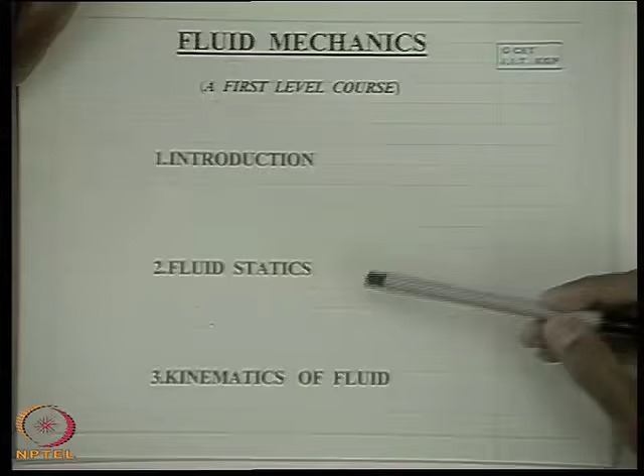Then we will come to fluid statics, which will cover all aspects of fluid statics, followed by kinematics of fluid. So the lecture schedule will go like that: fluid statics part 1, part 2, part 3, and then kinematics of fluid as number 3.

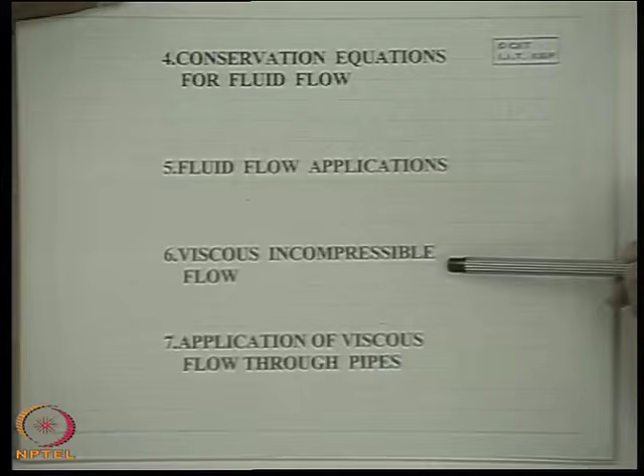Then we come to the next topic, for your exposure: conservation equations for fluid flow, the equations that govern the flow of fluid. Then fluid flow applications - details of these will be available in your leaflet or course curriculum given to you. Number 6 will be viscous incompressible flow, and number 7 will be application of viscous flow through pipes.

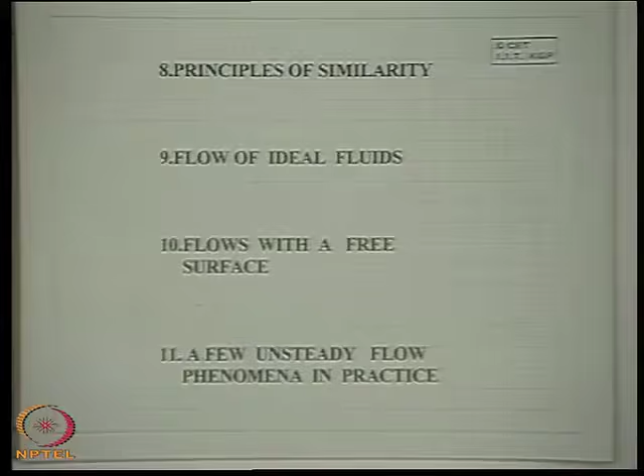Number 8 will be principles of similarity, which is very important in the field of experiments. One cannot do anything without the principle of similarity. If you want to predict the performance of any system in practice, in field, you will have to do model experiments in laboratory. But the question is, under what condition should model experiments be done? What should be the altered scale factors in terms of all variables, not only the geometrical shape of the model, that will allow you to predict results from your laboratory test for the actual system in practice. This is a very important subject at this level.

So, principles of similarity, then flow of ideal fluids, then number 10 flows with a free surface, number 11 is a few unsteady flow phenomena in practice, number 12 and 13, the last two lectures, introduction to laminar boundary layers - this will go to a little advanced stage - and then introduction to turbulent flow.

After that I will tell you about the books. As you know, the subject is classical, so there are a number of books. As a teacher, I do not feel you should always follow just one or two books. You can follow any book that covers the syllabus or course curriculum well. Book reading is a must for your concept - only the teacher's lecture will not do, because you will have to read books and solve problems from books. There are plenty of books, any will do, but let me mention a few good textbooks.

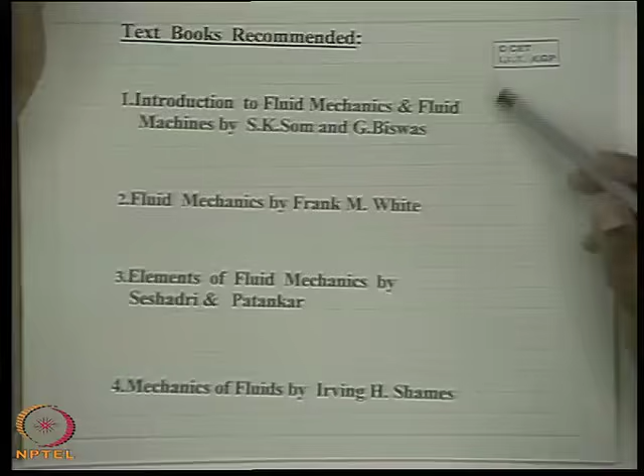The first book is by me, Som, and G. Biswas. I have already told you Professor Biswas is from IIT Kanpur. This book was written based on our teaching experience at IIT Kharagpur and IIT Kanpur. You can see this book is in the market, published by Tata McGraw-Hill.

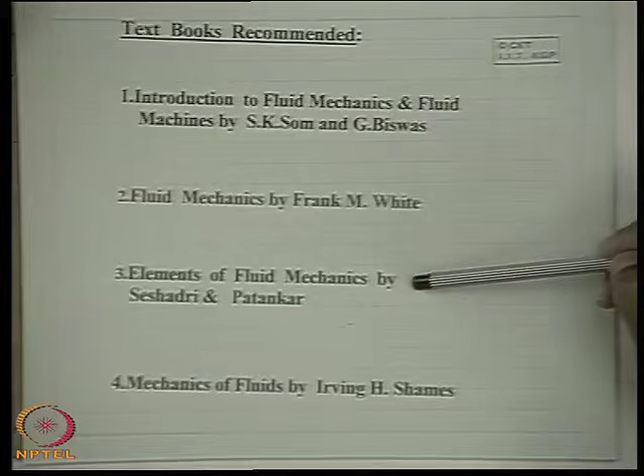Then Fluid Mechanics by Frank M. White, which is again a very good book, published by McGraw-Hill, widely followed in American universities. This book you will get in the library, but you probably cannot purchase it as it is costly. Other books are Elements of Fluid Mechanics by Seshadri and Patankar. Another very well-known classical book in the field, also by McGraw-Hill, is Mechanics of Fluids by Irving H. Shames. These are the textbooks recommended for this subject.

Now, after this, let us try to concentrate on the subject from the beginning. What is fluid, what is meant by fluid from the viewpoint of mechanics? How do you define fluid from the viewpoint of mechanics? The very first definition of fluid from the viewpoint of mechanics comes with its distinction in behavior from that of a solid.

If we apply a tangential force or shear stress to a solid, our common experience, or what we have already read, shows that the solid undergoes a definite deformation. Even if the shear stress exists, the solid may be under equilibrium with a particular shear deformation. And if we lift up the load, then what happens? The solid may or may not regain its shape - it may completely regain its shape or may not completely regain its shape.

Within certain limits, if the stress is relieved, the solid regains its shape, or beyond certain limits, the solid may not regain its original shape, or only partly. But fluid behaves differently: if a tangential force is applied to a fluid body, it goes on continuously deforming. You cannot make fluid at rest; it goes on deforming continuously.

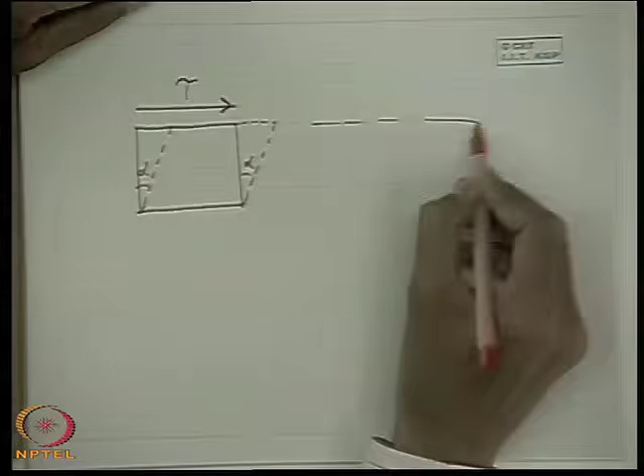Whereas if we have a fluid flowing, consider a fluid element in this flowing stream. If a shear stress is applied on the fluid element, a linear element in the body goes on continuously deforming. If you see a linear element 0,1, it goes to 0,2, 0,3, 0,4, like that. That means a continuous deformation takes place, and this continuous deformation constitutes the flow.

So we come to two very important conclusions from the mechanics point of view which differ fluid from solid: solid can resist shear stress under static equilibrium with a finite deformation, and it can regain its original or partly original shape when the load is relieved. Whereas fluid goes on continuously deforming, meaning fluid resists tangential force only under dynamic condition. It cannot resist tangential stress under static condition. It does resist the tangential stress, definitely, but while resisting, it goes on moving continuously, meaning a continuous deformation takes place.

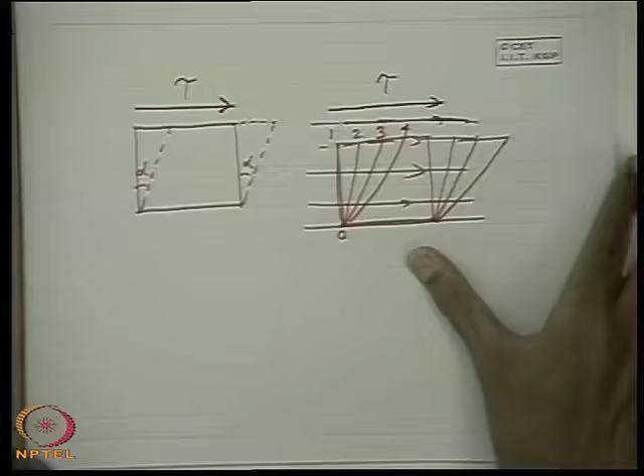Now, after this, I will tell you another very important concept before proceeding further: the concept of continuum. Write: concept of continuum. What is meant by the concept of continuum, or continuous medium?

The two terminologies are continuum or continuous medium. What is meant by this? Very simple. In the description of matter, when we define a property or parameter, for example pressure, velocity, or temperature, we define it as a continuous function of space within the matter at any time, or as a function of space and time.

So what does this assume basically? It assumes that at each and every point in the matter there is a molecule, because all matter is composed of molecules. Only then can the property be defined as a continuous function of space in the matter, with no discontinuity. Though matter is composed of molecules with gaps between them, we always assume while defining properties this way that there is a molecule at any time, at any point in the matter, meaning the gap between molecules is almost zero.

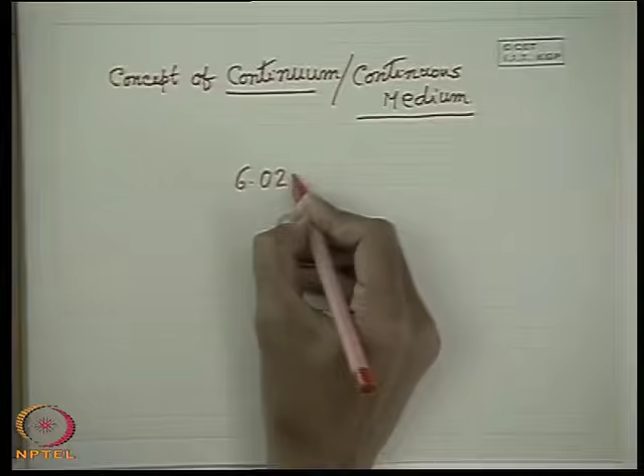The number of molecules within a certain volume of gas is given by Avogadro's hypothesis. If I recollect, Avogadro's number gives approximately 6.023 into 10 to the power 23 molecules, at standard temperature and pressure, per 22.4 liters of gas. So at that standard condition, you can find a molecular density of approximately 2.7 into 10 to the power 25 molecules.

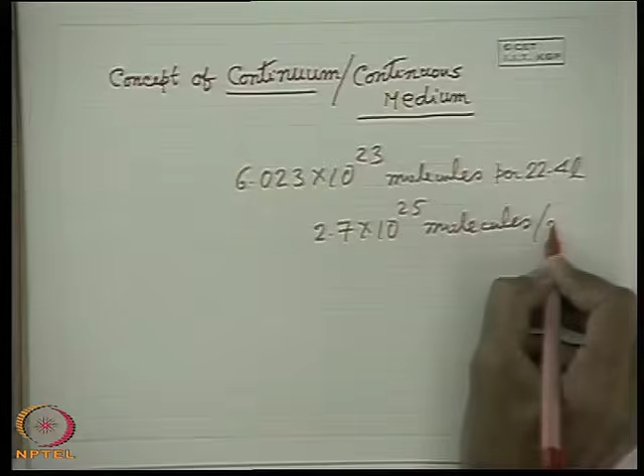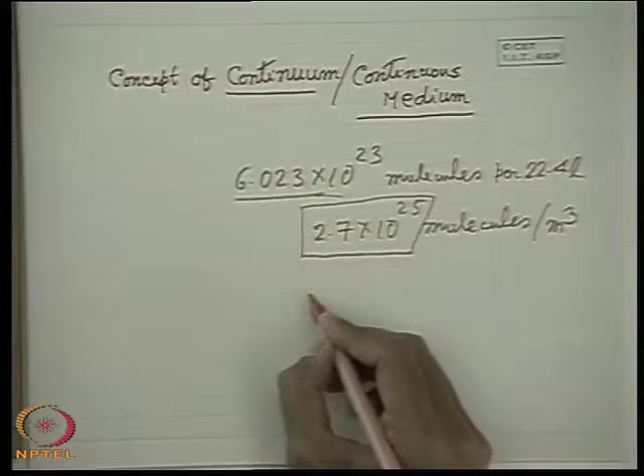Per meter cube, that means divide this by 22.4 which gives per liter, and multiply by 10 to the power 3. So this figure comes to approximately 3 into 10 to the power 25 molecules per meter cube, which is so high that under ordinary conditions we can think that gas molecules are closely packed enough to neglect the distance between them, and define the properties or point functions of the fluid as a continuous function of space within the matter.

This is precisely the concept of continuum. But does this mean the concept of continuum or continuous medium is always valid? For example, if you go on rarefying the gas, so the pressure decreases continuously, we know that the distance between the molecules increases, and the cohesive force between the molecules decreases. So whether the continuum will be valid or not?

That pertinent question was answered by a scientist, who found a criteria based on which the concept of continuum will hold good. This criteria is based on the distance between the molecules, which is well characterized by the mean free path.

What is the definition of mean free path? It is the statistically average distance the molecules travel between two successive collisions. If this path were 0 theoretically, the molecule would always be in collision at any instant, meaning there is no distance between the molecules. So lambda is not 0; it has some value, the statistical average distance molecules travel between two successive collisions.

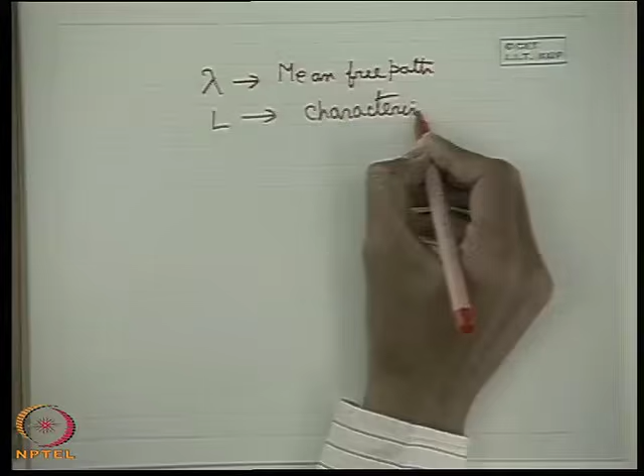For example, in the case of pipe flow, it will be the diameter of the pipe. For flow past a body, it is some dimension of the body. So the characteristic dimension of the problem depends upon the problem. Now if we recognize lambda as the mean free path, and L as any characteristic dimension of the problem, that depends upon the physical problem.

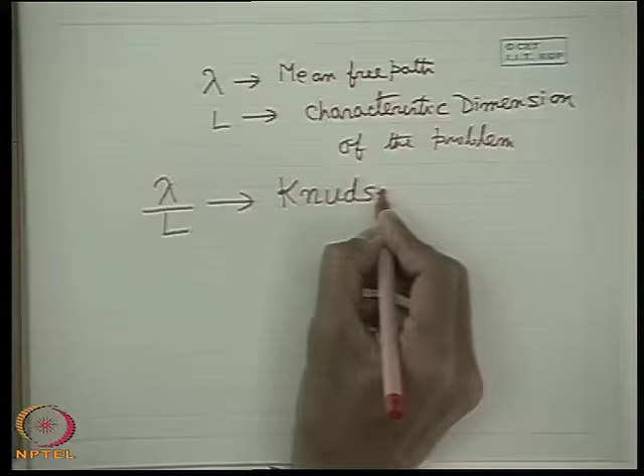Then the relative magnitude, this ratio lambda by L, is known as the Knudsen number, named after the scientist Knudsen. Knudsen number equals lambda by L.

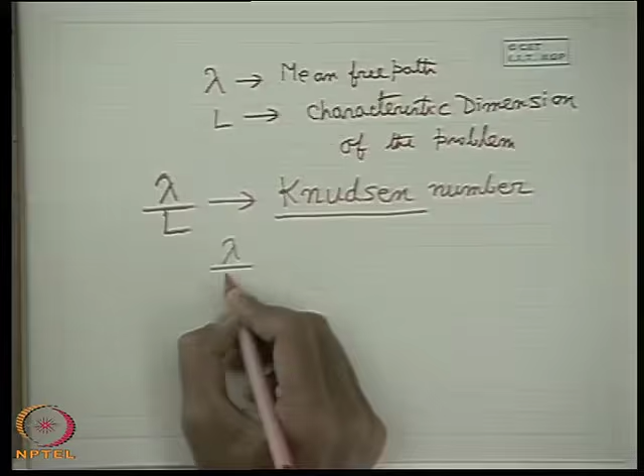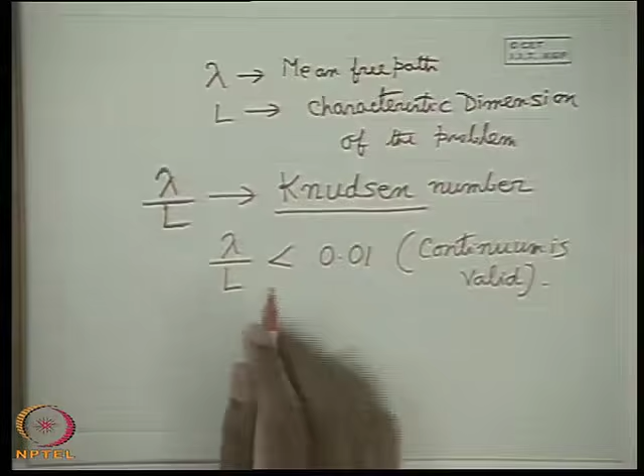This lambda by L serves as the criteria for the concept of continuum. When lambda by L is less than 0.01, the concept of continuum is valid.

You must know about the departure from continuum: when lambda by L is greater than 0.01 but less than 0.1, we call it slip flow, and the concept of continuum is no longer valid. From 0.1 to 10, the flow regime is known as transition flow.

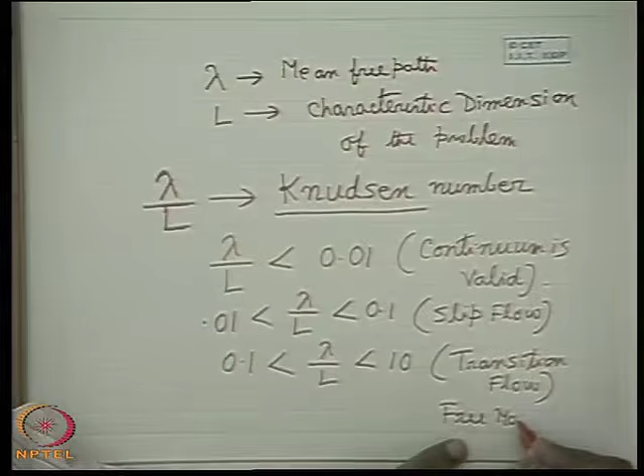This transition is from slip flow to free molecular flow, where the most realistic case requires analyzing the behavior of individual molecules. When lambda by L is greater than 10, the flow is known as free molecular flow.

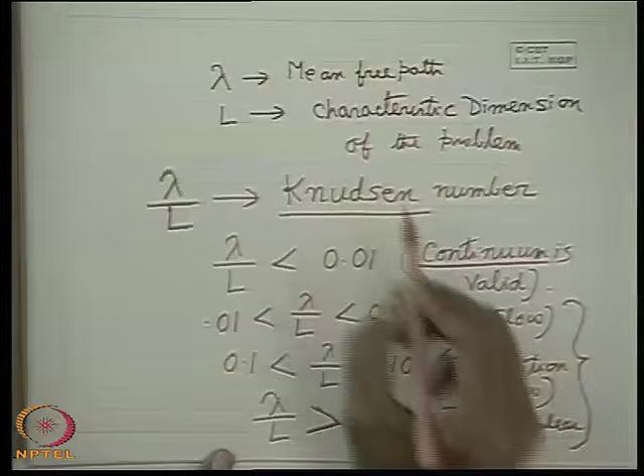However, our course does not consider this. We will only be within the continuum or continuous medium regime. So in all ordinary cases of fluid flow, meaning ordinary thermodynamic states of the fluid medium, the concept of continuum is well valid, that is, lambda by L is less than 0.01.

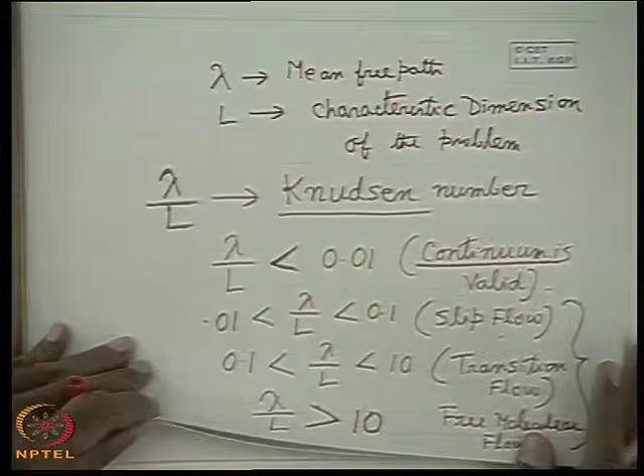Now we come to a very important property of fluid: viscosity. This property, viscosity, you have heard of since your childhood.

At the very beginning, what is written in many books about viscosity will be a repetition to you since you've read it at school level too. I first tell you that viscosity is a property of the fluid, but it is manifested only if the fluid is in motion. The viscosity property has got nothing to do with the fluid at rest.

So the concept of viscosity is realized through the motion of the fluid. Until and unless we analyze the motion of the fluid, the viscosity effect is not understood or manifested.

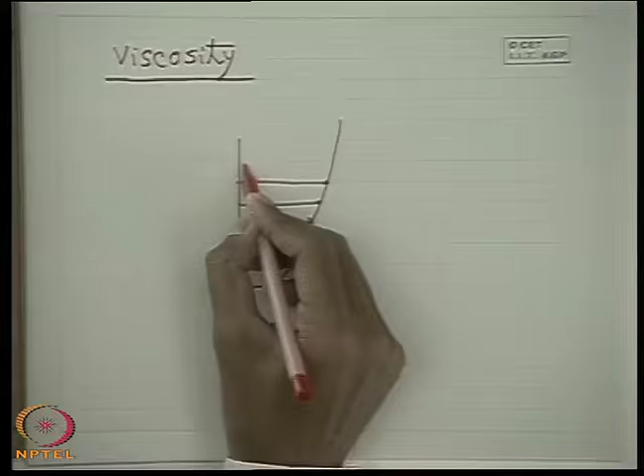Let us consider a flow of fluid where velocities are like this. Let us consider two axes: this is the x axis, this is the y axis.

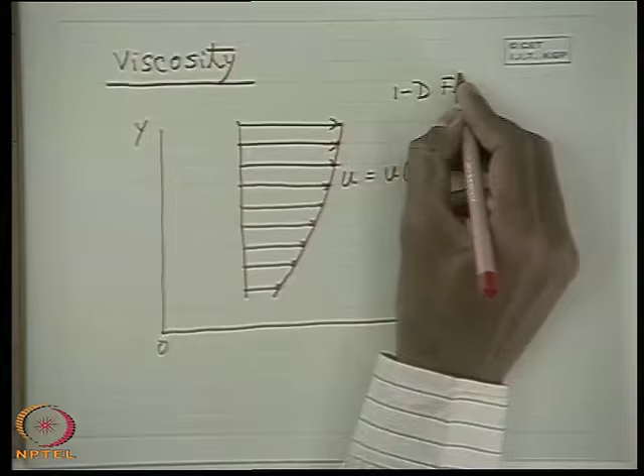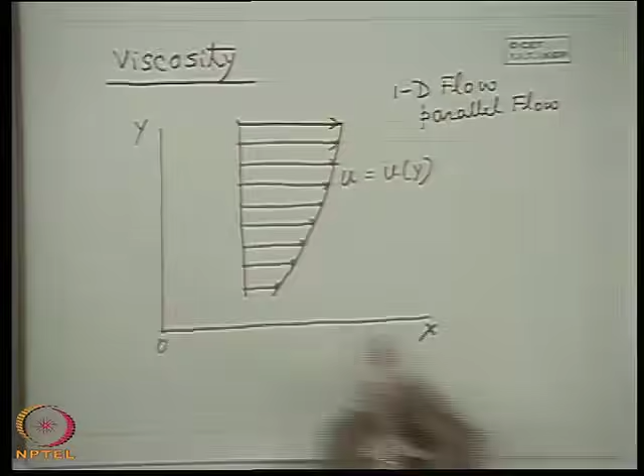Consider a situation of flow where the velocity u is in the x direction, which is a function of y. This type of flow is known as one dimensional flow, or parallel flow, where the flow velocities are in one direction, along the x axis, and parallel to each other, as a function of y only. At any section, point, or region, we recognize the flow field, the velocity of flow as a function of y.

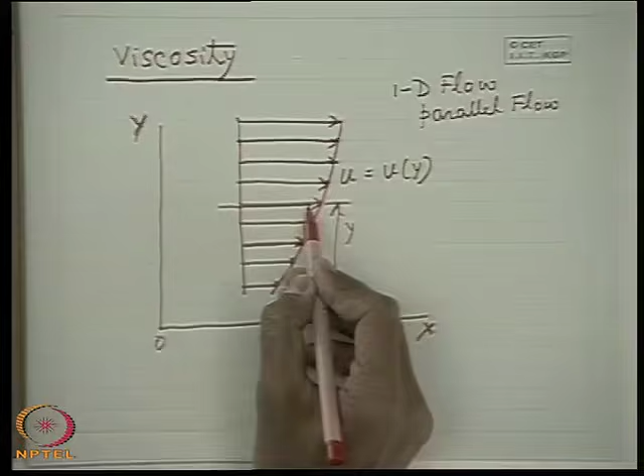At any distance y measured from this, that is at any location, we find the existence of a shear stress. A field of shear stress also exists along with this flow, which varies in the y direction, because the flow field, the velocity, is a function of y.

So if a flow field is like this, whenever the flow takes place, there will be a variation like that. This is a very simple case of one dimensional flow, where we find that there is a shear stress at each and every location in the flow field.

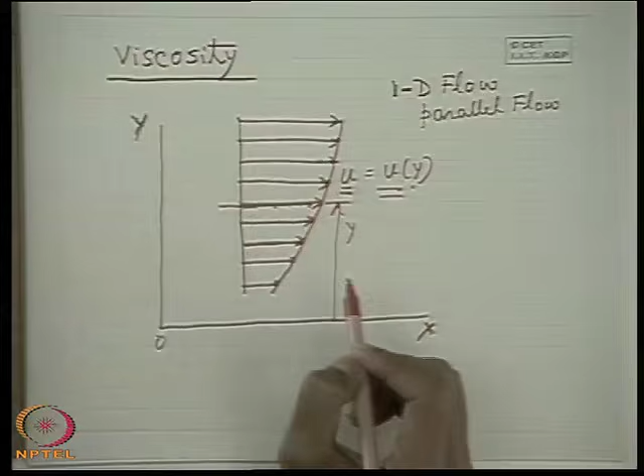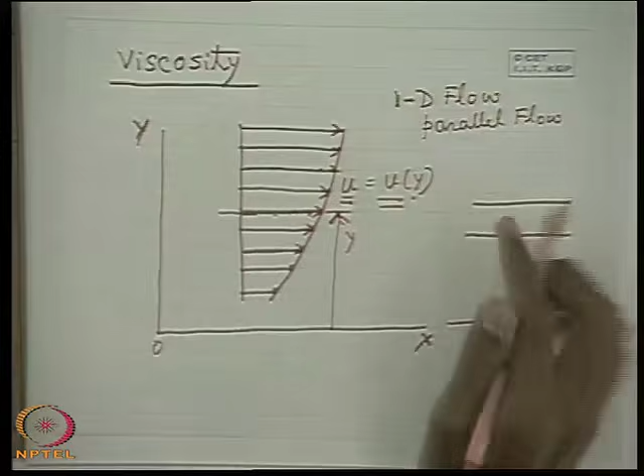If you look at two adjacent neighboring layers at a distance y, in an exaggerated view, we find two fluid layers. They are adjacent layers, drawn in a very exaggerated manner, separated by the distance y. The upper layer, because of its velocity in this direction with respect to the lower layer, tries to drag or draw the lower layer in the direction of flow with a force F.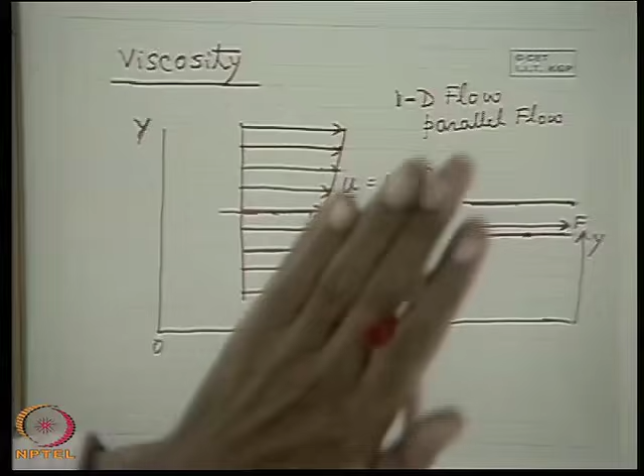Because relative to this layer, it is moving in this direction, so it tries to draw this layer with a force F. These are two adjacent layers lying one over another. This figure, which I have drawn in an exaggerated manner, shows two adjacent layers touching each other.

The upper layer is moving with a higher velocity because of the typical velocity field where u is a function of y, such that u increases with increase in y. That means we assume the upper layer moves with higher velocity, so relative to the lower layer, it tries to draw the lower layer in the same direction by giving a tangential force.

By Newton's third law, the same force is given by the lower layer to the upper layer, to retard the upper layer to a certain extent. So the mutual action between these two layers through these tangential forces is to oppose the velocity variations, that means to equalize the velocity. It tries to accelerate one and retard the other.

However, in both cases, a field of stress is developed, and between the two layers it is balanced. But if you make an isolation, just like a free body diagram of this fluid body, we see that on this layer there is a tangential force or shear stress, that is force by area, which is the force exerted by the adjacent layer, which we have separated out in conceptualizing it as a solid body, a free body, for that liquid material.

So this way we can conceive that a shear stress field is also developed in the fluid. That means if we write the shear stress tau equal to F by A, as you know, if we define the area, then tau is also developed.

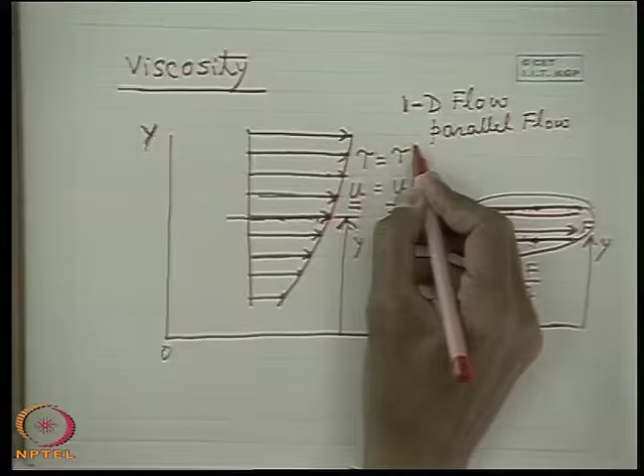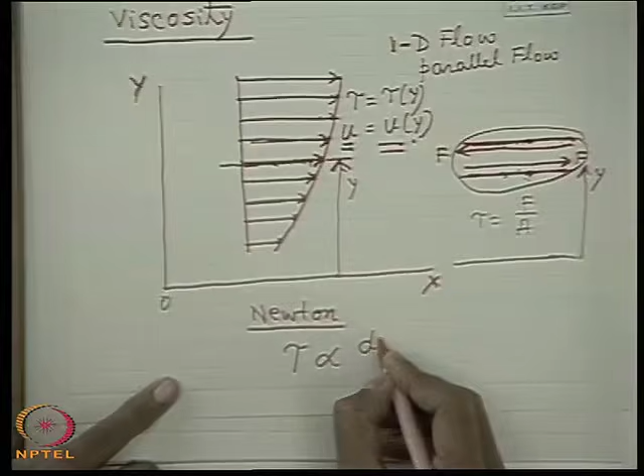It was Newton who first found out from experiments that the shear stress in this type of flow, considering only the simple flow, is linearly proportional, directly proportional, to the velocity gradient du/dy, and the direction in which the shear stress acts depends upon the direction of du/dy, or the sign of du/dy.

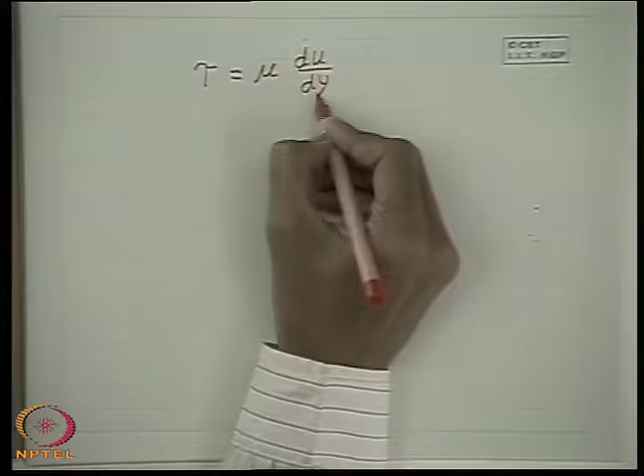If du/dy is going to be less, that means the curve becomes flat, so the shear stress will go to a very low value. So shear stress is proportional to du/dy, and this can be written as shear stress equal to some proportionality constant mu into du/dy, and this mu is the definition of viscosity, known as the coefficient of viscosity.

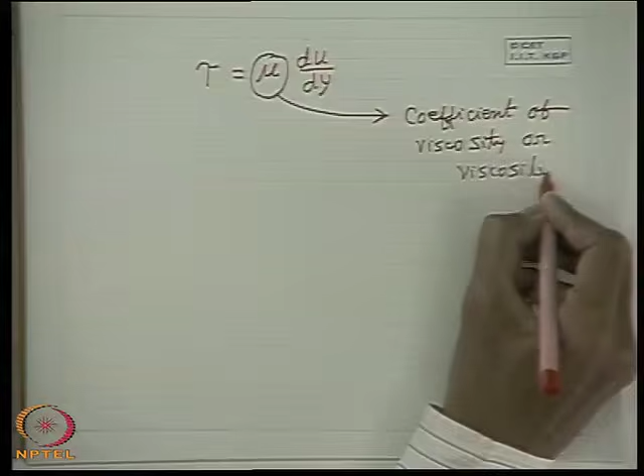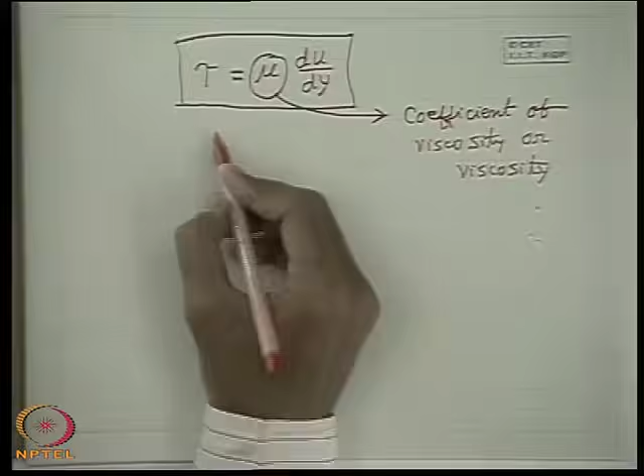Sometimes by viscosity we simply mean this. So this is a very simple equation in case of one dimensional or parallel flow, where u is a function of y, that tau equals mu du/dy, which means shear stress divided by the velocity gradient at any location remains constant, and that constant is the coefficient of viscosity. This equation precisely defines the coefficient of viscosity.

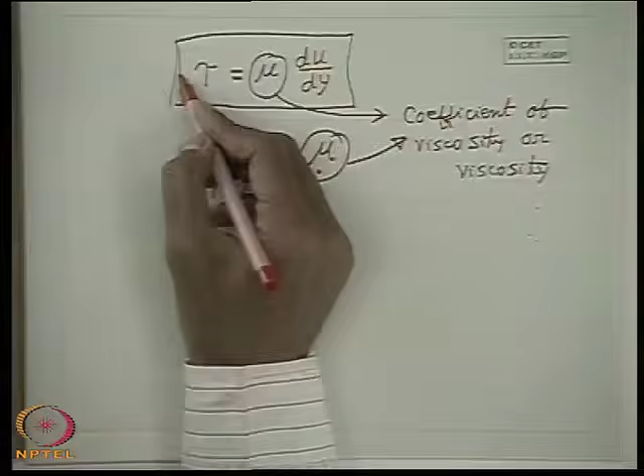But here I have to say something which you will not find in almost all books. In my book you may find a line that initially this relation is known as Newton's law of viscosity. Let me write that: this is known as Newton's law of viscosity.

So I tell you one thing: whenever this is asked, what is Newton's law of viscosity, people say shear stress is proportional to the velocity gradient. It is so. In the very first phase of this course, we describe it in such a way that this law states the shear stress is proportional to the velocity gradient at the location. But this is not the generalized statement, which will become clear after a few classes.

This velocity gradient, this is not really the velocity gradient. Mathematically this is the velocity gradient, but physically this is not the velocity gradient. What is the physical entity of the velocity gradient? Shear stress, we understand, is stress. This is the rate of shear strain.

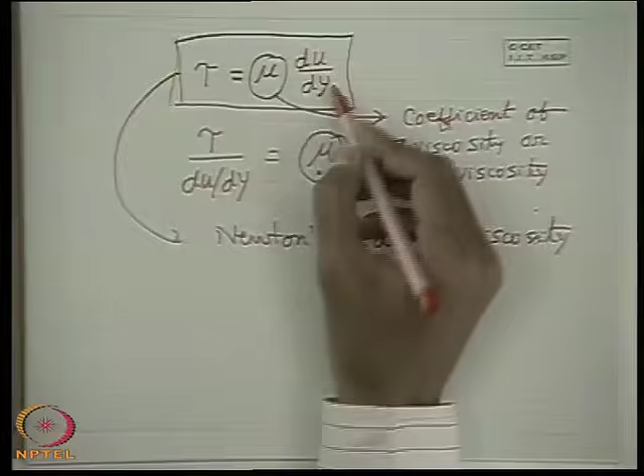In a very special case, this will be shown afterwards in kinematics of fluids. For a parallel flow, when there is one component of flow u, which is a function of y, the rate of shear strain becomes simply the velocity gradient. That's why I will tell you to recognize this du/dy as the rate of shear strain. So at the present moment, you find this.

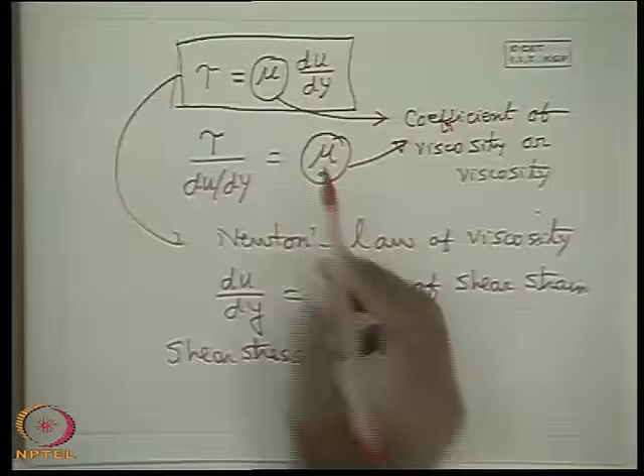Newton's law of viscosity tells us shear stress is proportional to the rate of shear strain, and the proportionality constant is the coefficient of viscosity, which is constant for the fluid and is a property of the fluid. So the velocity gradient, in the simple case I explained, is the rate of shear strain, the rate at which shear strain changes with time. Fluids which obey this law are known as Newtonian fluids.

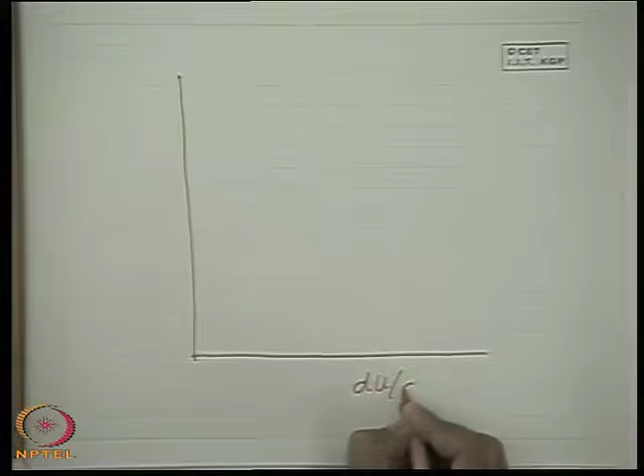If I draw this in a graph with du/dy on the abscissa, which is the velocity gradient in a simple case of parallel flow, or the rate of shear strain, and tau on the other axis, we see that for a given fluid it is a straight line, and its slope is mu, the coefficient of viscosity. For different fluids it will be different.

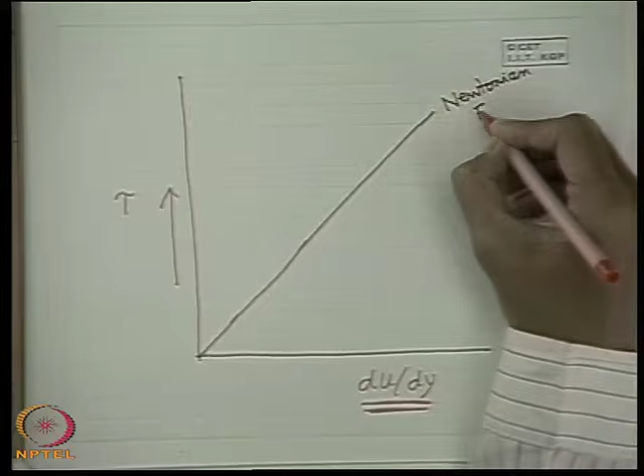This is known as a Newtonian fluid, where the stress is linearly proportional to the velocity gradient or rate of shear strain.

Now there are other fluids. Usually all engineering fluids commonly encountered in practice—water, air, oils, mercury—are all Newtonian fluids, where the shear stress is proportional to the velocity gradient or rate of shear strain, and the proportionality constant is known as viscosity, which is a property of the fluid.

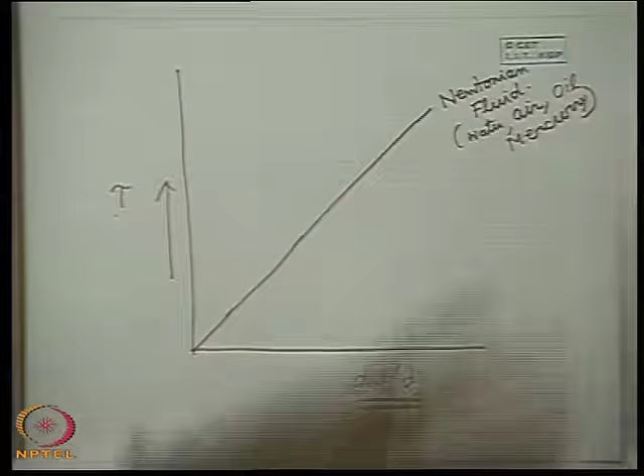But there are other fluids which do not obey this linearity law between shear stress and velocity gradient. These are known as non-Newtonian fluids.

So what are non-Newtonian fluids? Whose constitutive equation—that is, the relationship between shear stress and the rate of shear strain or velocity gradient for a simple case of flow—is not linear but nonlinear. These kinds of fluids are known as non-Newtonian fluids.

There are several fluids not usually encountered in engineering applications, but in process engineering and biomechanics applications, fluids exist which are non-Newtonian. For example, blood is a non-Newtonian fluid, milk is a non-Newtonian fluid, and different polymer solutions are non-Newtonian fluids.

Well, this is a vast subject. Non-Newtonian fluid itself is a very vast discipline. High molecular weight oil is a non-Newtonian fluid, gelatin is a non-Newtonian fluid, aqueous suspension of starch is a non-Newtonian fluid, and ink is a non-Newtonian fluid.

But non-Newtonian fluid as such is not so simple. It is not sufficient to say that non-Newtonian fluids are those where the shear stress and velocity gradient relationship is not linear—that is, which does not obey the basic Newton's law of viscosity, that tau is directly proportional to du/dy. It is not sufficient because there are many complications.

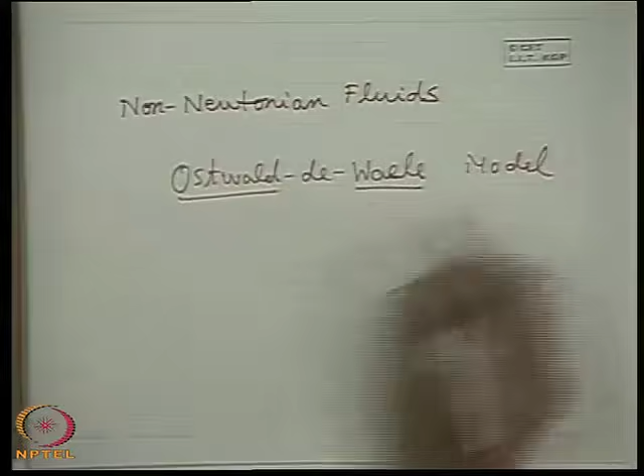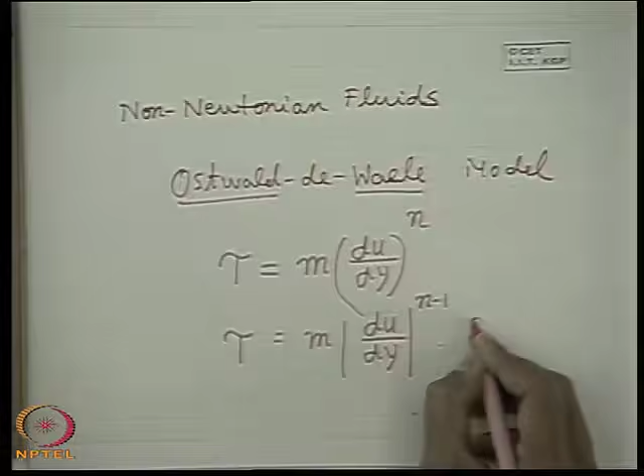It is one of the simple power law models. It states tau equals m times (du/dy) to the power n. It can be written in a different fashion to denote the sign of tau with du/dy, as m times du/dy to the power n minus 1, times du/dy, so that the sign of tau comes out consistent with the sign of du/dy. This is known as the power law model.

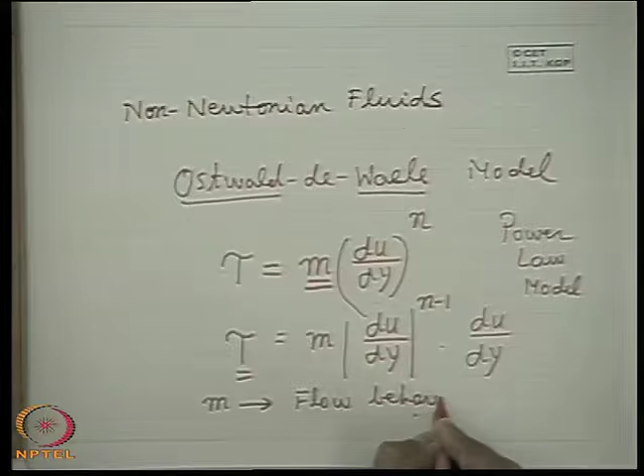A class of fluids, many polymer solutions, follow this power law model. Here m is known as the flow consistency index, and n is known as the flow behavior index.

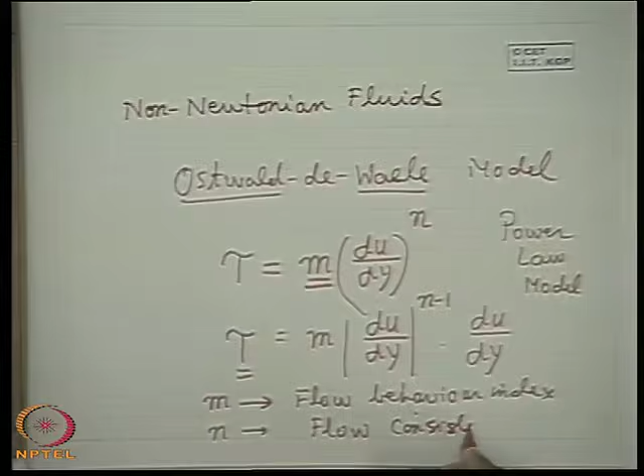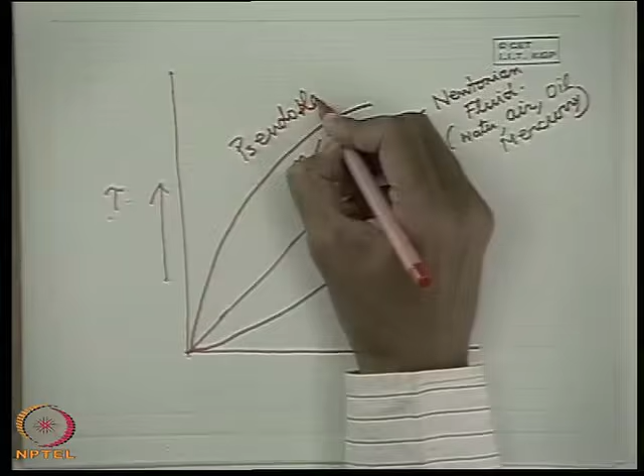Consistency index. If you plot this power law model, we get two curves: one for n less than 1, and one for n greater than 1. There are fluids with power law behavior for both cases. The case with n less than 1 is known as pseudoplastic fluid, and the case with n greater than 1 is known as dilatant fluid. Pseudoplastic and dilatant are two broad classes of simple power law non-Newtonian models.

Now again, this is the tau versus du/dy curve, where the straight line represents a Newtonian fluid, whose slope is the viscosity of the fluid. Okay, I think time is up for today.

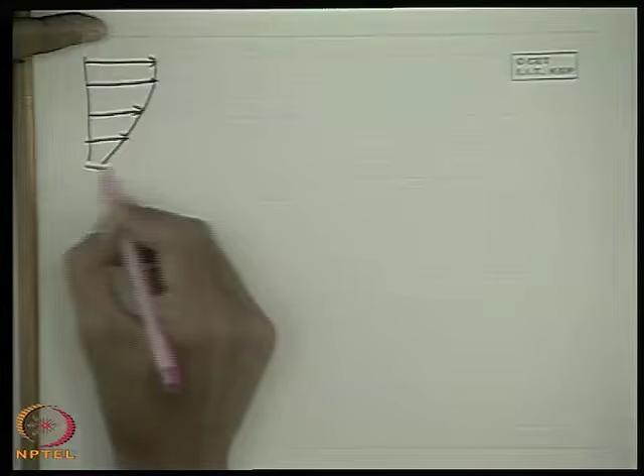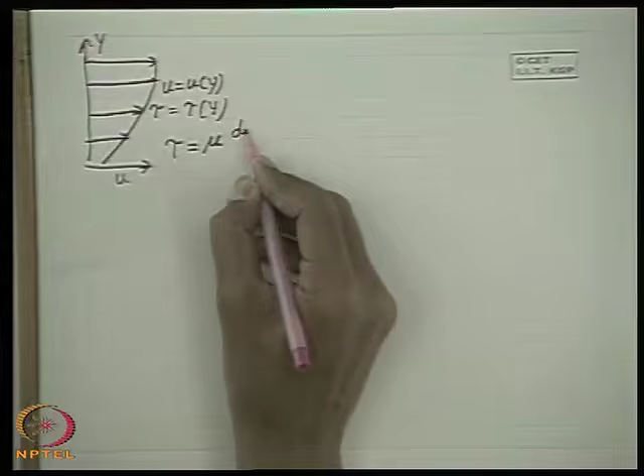So this constant of proportionality is known as viscosity, or the coefficient of viscosity. And if we recall, we also discussed...

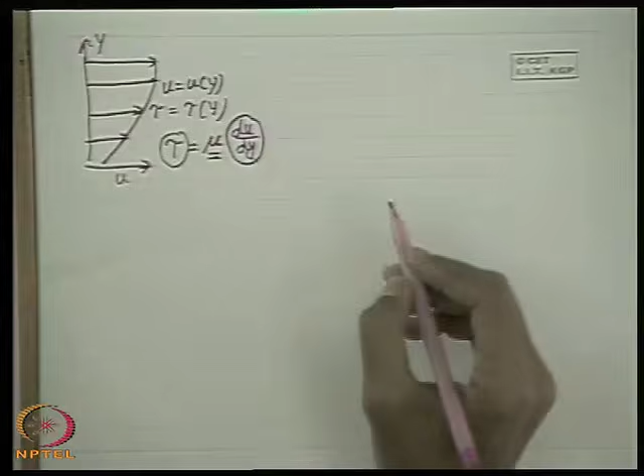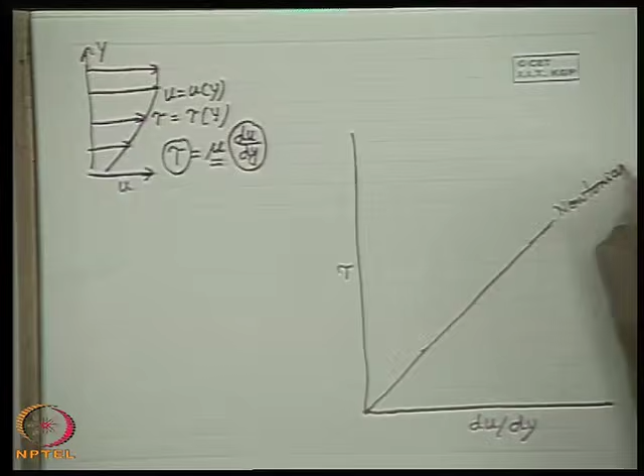If we show this in a tau versus du/dy plane, then this linear relationship is shown by a straight line like this. The fluids which obey this law are known as Newtonian fluids, since the law is known as Newton's law, discovered first by Newton. So the constitutive equation is linear through origin. This is the Newtonian fluid, and the slope of this line determines the value of the viscosity coefficient.

On the other hand, we recognize that there are classes of fluids which do not obey this linear relationship, known as non-Newtonian fluids. These fluids in general behave differently from this, and in fact no single model can be established for a class of non-Newtonian fluids.

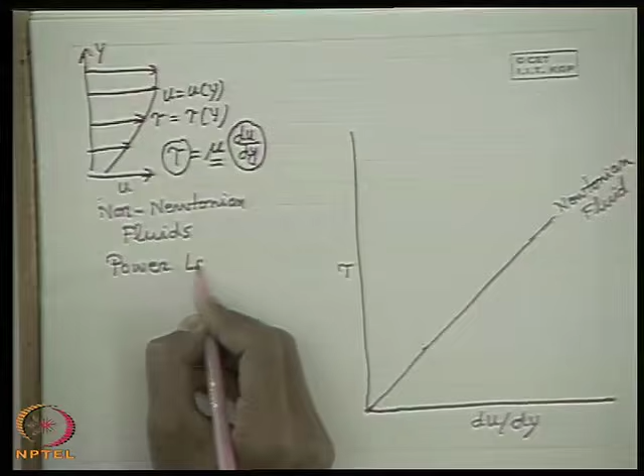So we discussed a very simple power law model for a class of fluids, which is that the relationship between tau and du/dy bears a power law type relation, that means m into du/dy to the power n, or we expressed it a little differently, m into du/dy to the power n minus 1 into du/dy, to give the sign of tau with this du/dy.

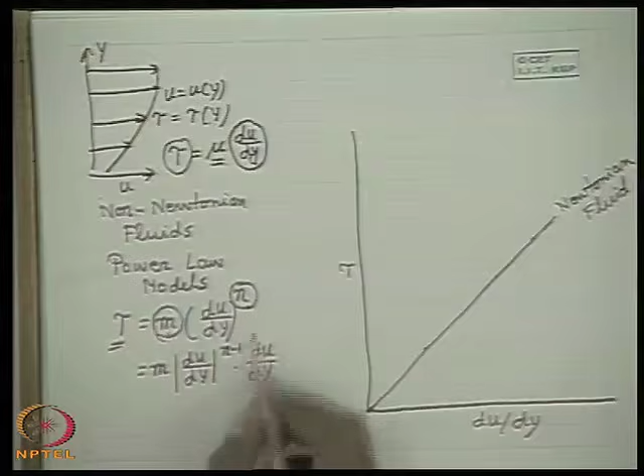Here m and n are the constant parameters of these equations. These are known as, I told you in the last class, m as the flow consistency index, n as the flow behavior index. So these power law models were found by the scientist Ostwald de Waele, known as the Ostwald de Waele model.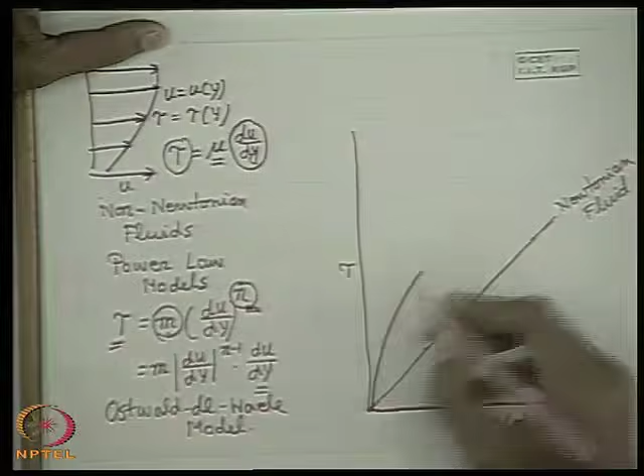So the fluids that obey a power law model have values of n greater than 1 and less than 1. If you plot the power law curve with the index n less than 1, the curve is like this, and with n greater than 1, the curve is like this. The difference is that the slope, tau divided by du/dy, decreases in this case with an increase in du/dy. In this case, when n is greater than 1, the slope increases with the increase in du/dy. Slope means tau by du/dy. So these are the two curves.

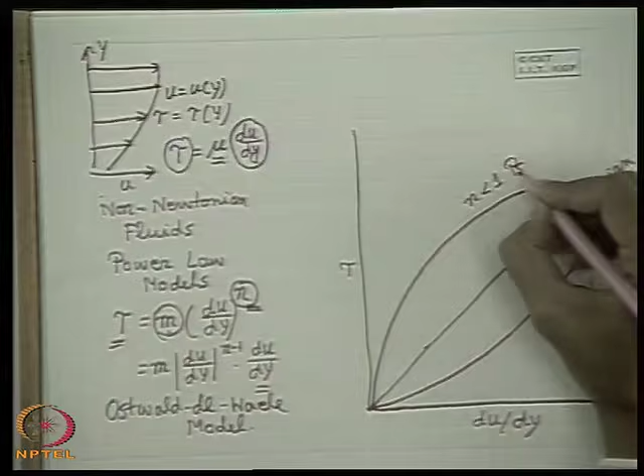So the liquids or fluids which follow n less than 1 are known as pseudoplastic fluids, whereas n greater than 1 is known as dilatant.

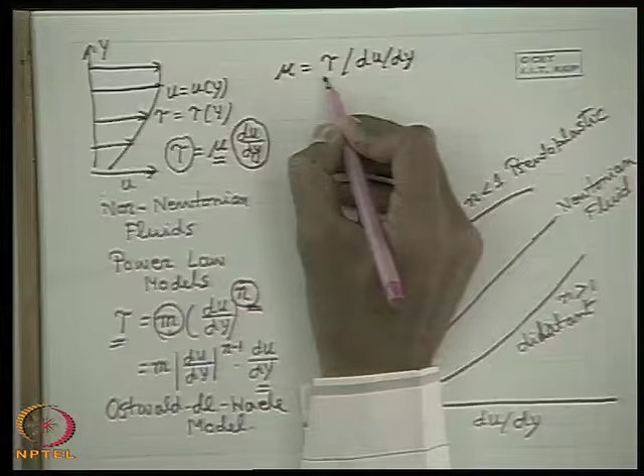One interesting feature is that viscosity for any fluid is defined as tau divided by du/dy. That means it is the ratio of shear stress divided by the velocity gradient in this case of flow, or as we will see afterwards, the rate of shear strain. That is the definition of viscosity. So if it does not bear a linear relationship, the ratio is not constant, which simply means for any fluid whose constitutive equation is not linear, this ratio is not constant.

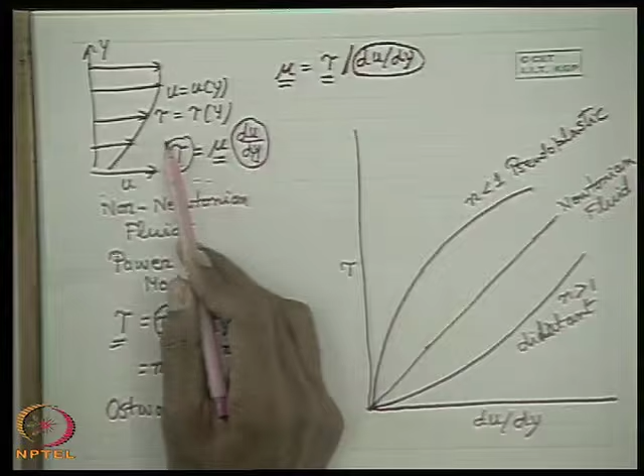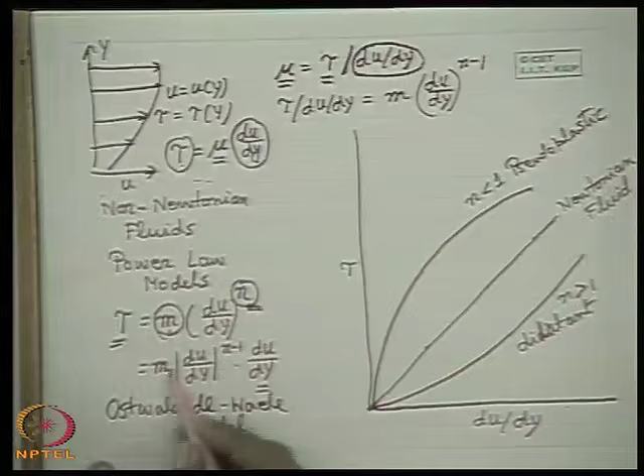For example, if we see this ratio from this expression, tau by du/dy will be simply equal to m(du/dy)^(n-1). This is simple school level mathematics. This means, from the definition of viscosity, if we write tau by du/dy as mu, we see mu precisely depends upon the velocity gradient, that is, it depends upon the flow situation.

So therefore it is no longer a constant and ceases to be a property of the fluid. For Newtonian fluids only, mu is a property of the fluid, but for non-Newtonian fluids mu is not a property of the fluid since it depends upon the flow situation, as well as upon the flow behavior index and flow consistency index. In this case, this mu is known as apparent viscosity.

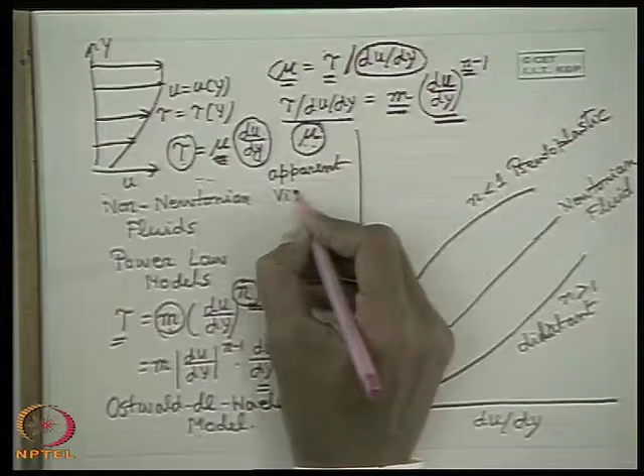Apparent viscosity, mu is known as apparent viscosity. Now after this, I will come to the definition of two very important things.

One is ideal fluid. What is meant by ideal fluid? The simple definition of ideal fluid is a fluid whose viscosity is 0. That means we consider a hypothetical fluid whose viscosity is 0. But to be very frank, all fluids in reality have a viscosity greater than 0. There is no fluid whose viscosity is 0, but we define an ideal fluid as one whose viscosity is 0.

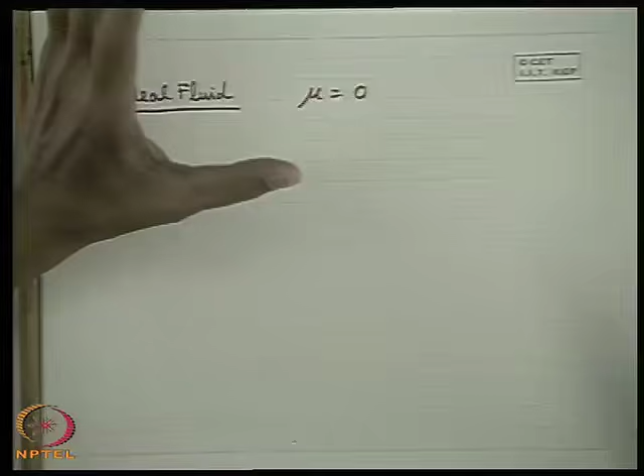But at this moment the query comes, why is such a hypothetical fluid defined, and why are there certain laws and principles relating to ideal flow of fluids? In your course curriculum there is a chapter on ideal flow of fluids. So at this juncture just know that real fluids have viscosity greater than 0.

So real fluids are known as viscous fluids. Now under certain situations of flow at very high velocities for viscous fluids, the flow field away from the solid surface can be very accurately generated by the principle of ideal fluid. And the theories and principles of ideal fluid, as it appears from common sense, will be much simpler than that of real fluids which have viscosity, because the parameter viscosity does not come into picture.

So this is the reason why the theory of ideal fluid becomes so important. At the present moment we may not know all these things, this is just for your interest. We can simply know that ideal fluid is a hypothetical fluid whose viscosity is 0.

So therefore if we see this curve, the abscissa represents ideal fluid. Why? If the viscosity is 0, this ideal fluid, whatever may be its flow condition or whatever may be its velocity gradient or rate of shear strain, there will be no shear stress developed in the flow field. That means the flow of an ideal fluid is devoid of any shear stress; the shear stress will not be generated.

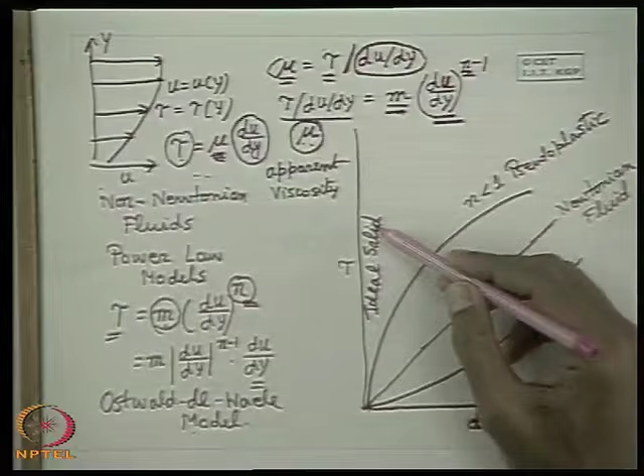Similarly, the ordinate represents ideal solid. You know from your earlier knowledge that an ideal solid is a solid where if you increase the stress to a very high value, there will be no deformation. This is the ideal solid concept. So the ordinate represents the ideal solid and the abscissa represents the ideal fluid.

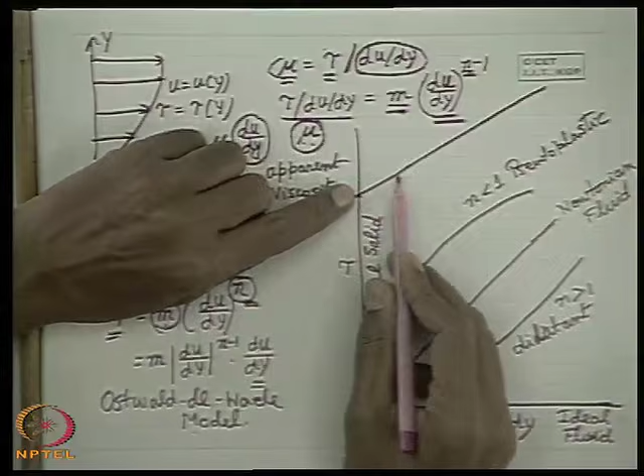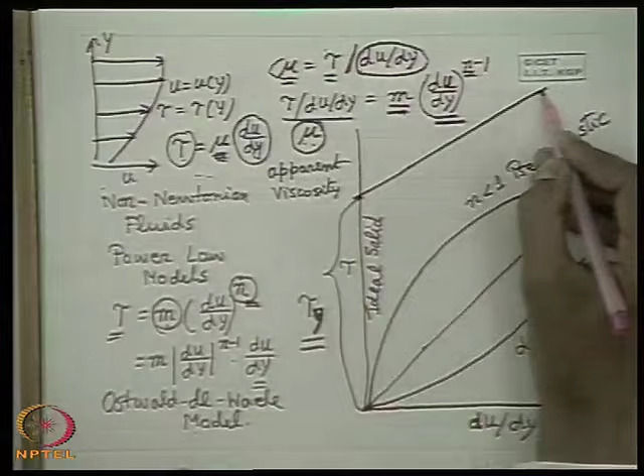Well, another class of fluids occurs in nature that behaves such that a definite amount of stress is required to cause the motion. That means flow takes place only after a definite stress is applied to those classes of fluids or substances, and this stress value is known as the yield stress, tau Y. This is the yield stress, after which the flow takes place. The relationship between the stress and the velocity gradient may be of different nature, but an ideal relation will be a straight line, and these substances are known as ideal Bingham plastic.

So Bingham plastics are those substances which require a certain yield stress to flow. Paste and similar types of liquids require a certain minimum stress for the flow to take place.

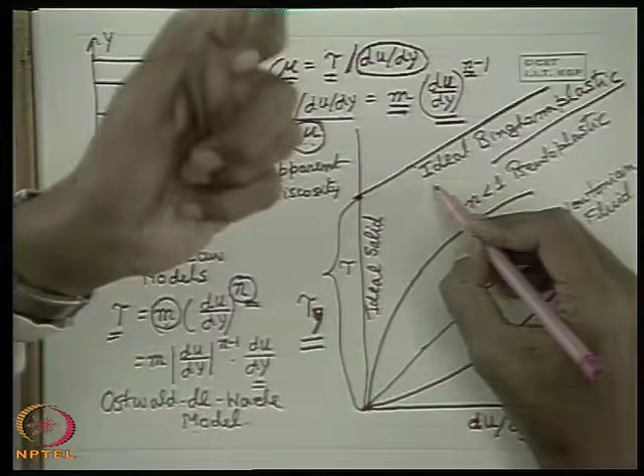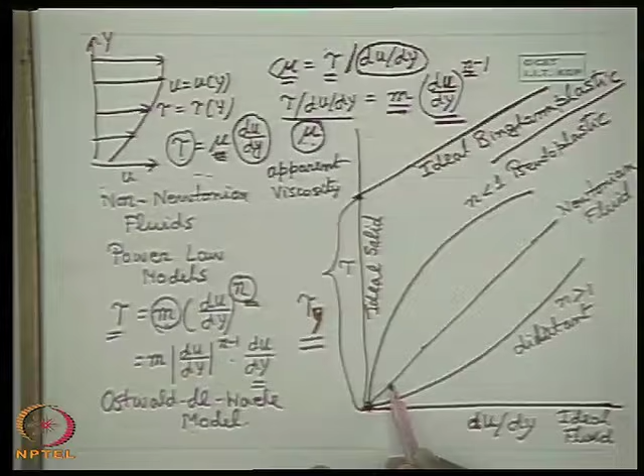And in case of ideal Bingham plastic, the stress and velocity gradient or strain rate relationship becomes linear. But there is a little reservation in calling this class of substances a fluid. This is because they don't start from the origin. The physical significance of any curve, linear or non-linear, starting from the origin is that under an infinitesimally small shear stress, the fluid starts flowing. That means a fluid cannot resist even an infinitesimally small shear stress under static condition.